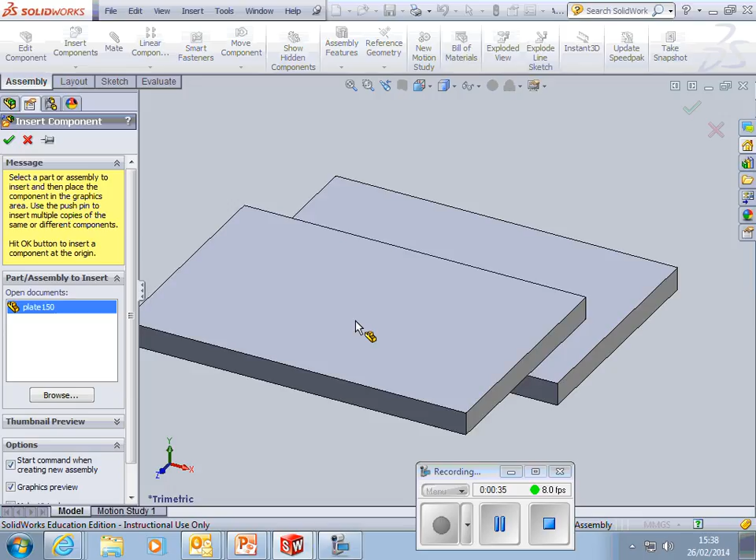Create a new assembly here, and just put one in. Let's put two of them in there for now.

First mate I'm going to do is I'm going to say I want that face and that face to be coincident with each other. So if we look at that now, this plate here is sitting on top of the other one. It can still be moved left, and slid over the top, but you cannot move it up and down as well. What's that? I thought you couldn't do that.

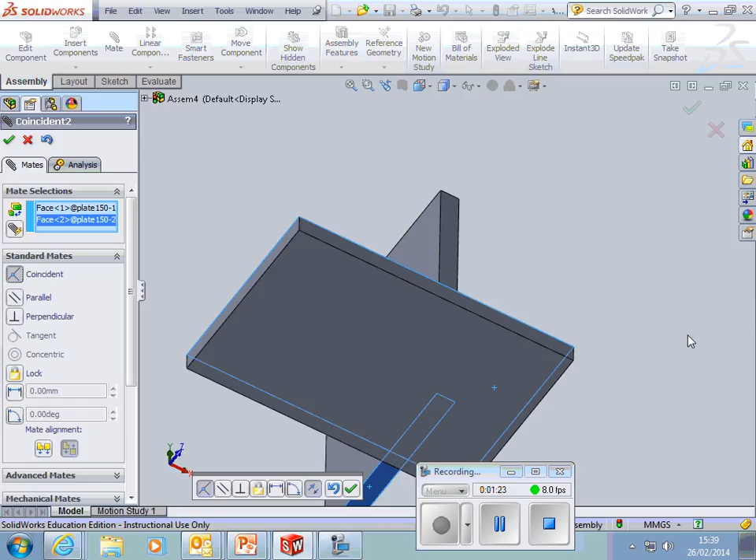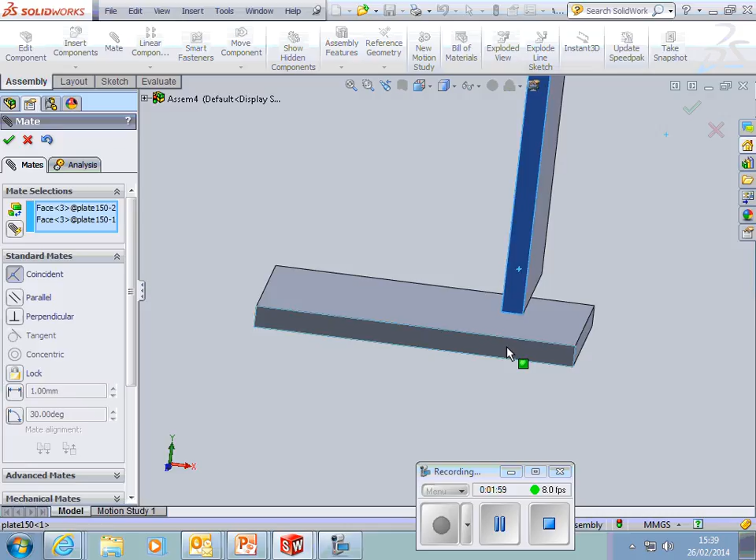But I want this face, and this face, to be coincident to each other, but a distance apart of, let's say, 30 millimeters. So now that's 30 millimeters from that face. And I want this face and this face to be coincident with each other, and I'm happy with that.

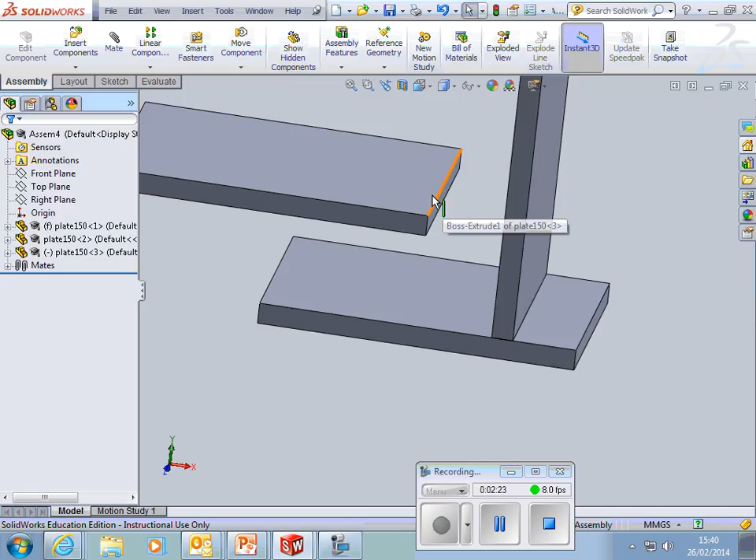Finished with mates for now. I'm going to put in another version of plate, and I'm going to make that face and that face coincident. I'm going to do that one first, Michael. That one and that one. That one and that one. Distance 30 mil.

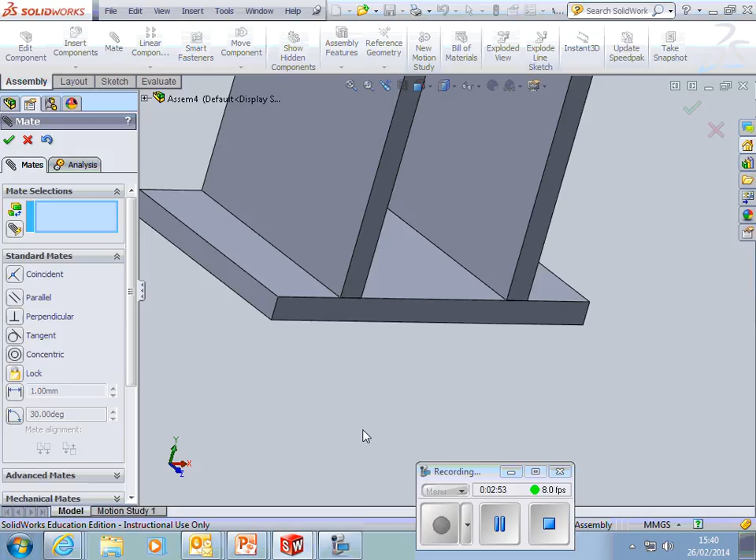Can't move either of those plates anywhere, fully constrained.

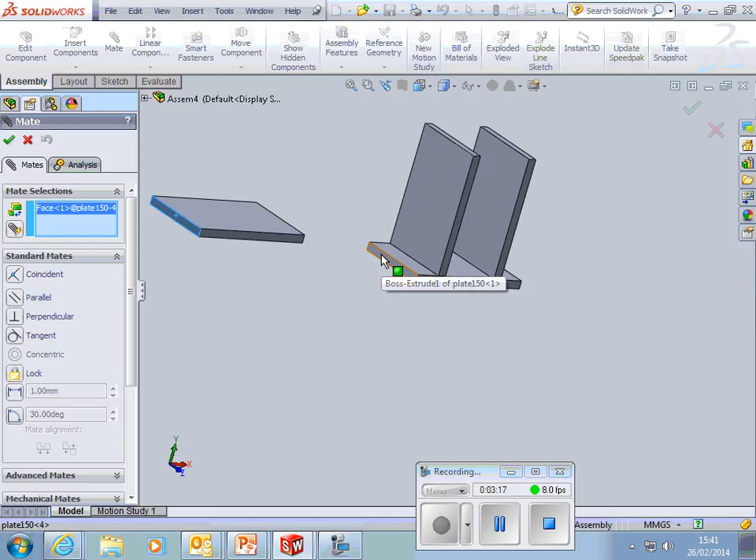Lastly, I'm going to put in a final plate like so, and I'm going to pick mate that edge and that edge parallel. What's that? Sorry, coincident with each other.

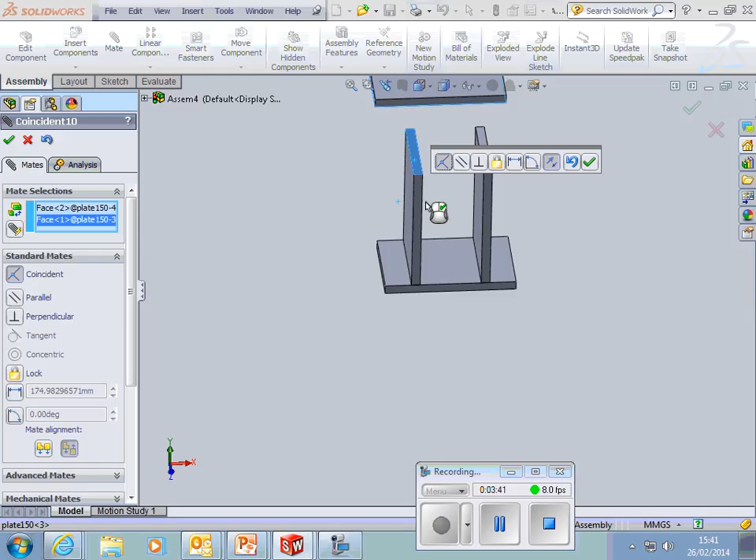That face and that face coincident. That face and any one of these faces coincident.

There are other things you've got, like when you want a hole to be concentric with a radius, you can select that one. Parallel, you can put things perpendicular to each other. So there are a range of mates that you can use to build up an assembly.

You can also create an assembly from other assemblies, so you can have sub-assemblies as you get more and more technical with this software, alright?

You'll only ever get proficient with it if you have a go, play around, make mistakes, and put them right. Okay? Always, everything you do is in these trees here, whether it's an assembly or the part itself, in the order that you did them in.

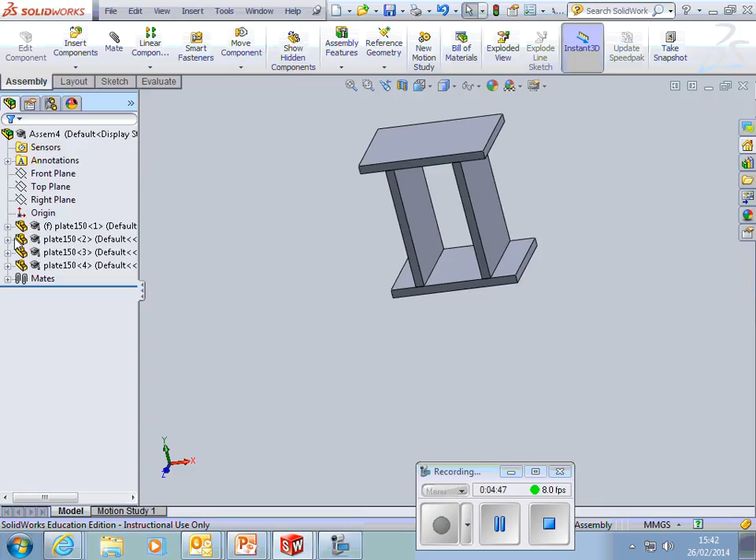If you're doing something quite complex, it's probably good practice, at least like this one, to give sketches, parts, and extrusions names so you know what they do.

You can change the names of these, so I can call that anything I like. So you can name your tree so that you can find your way around it. But everything in there goes in that tree in the order that you created it. Okay?

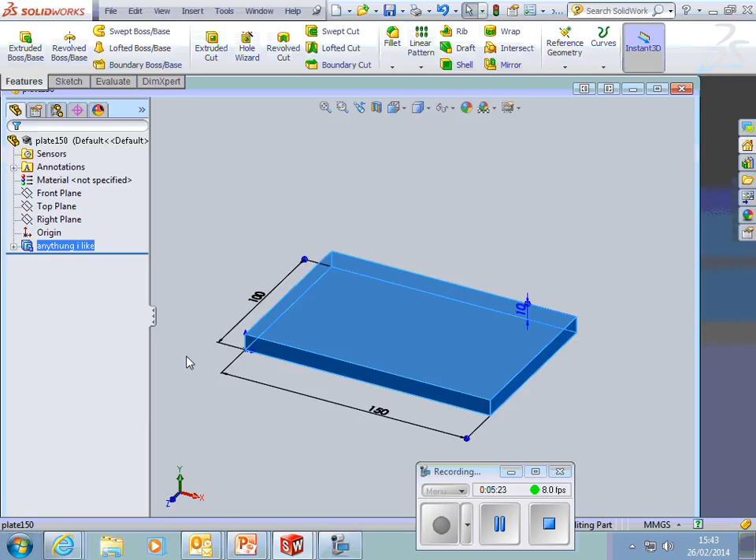That'll end off my SolidWorks session.